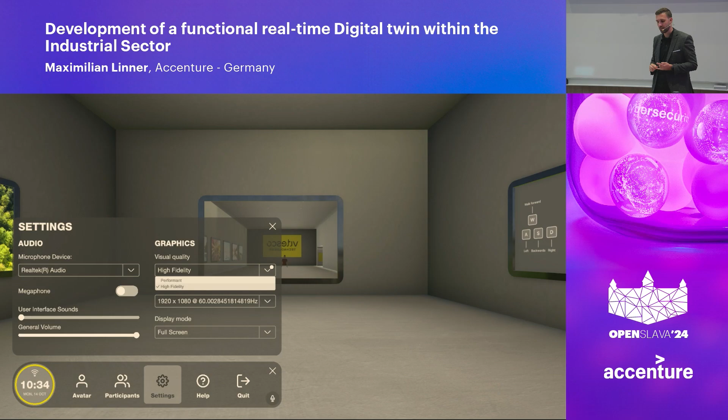The next point is, as I mentioned, the avatar configurator. So there are different styles how you want to configure yourself. Sometimes we just have some predefined avatars to select for yourself, but in this case, we really want to be able to configure the avatar as I want. So what you can see in here is that I can change my body shape, I can change my skin tone, I can change which kind of facial features I have, which kind of eye colors I have.

Obviously the clothing is important here as well. So different kinds of clothing, colors. So I think you get an idea how you can customize your avatar as you wish. So obviously I could be more to the female way, more to the male way. So yeah, this is the configurator which we have in place.

And the good thing, what I wanted to mention, is we have a team internally who is constantly developing and improving the different modules. So at the end, this avatar configurator is kind of 2.0, but if somebody in the background is updating it, making it even fancier, we can deploy it very easily into our projects.

The next point is a whiteboard. So obviously sometimes we want to write down our thoughts, right? To collaborate with our people who are in the 3D environment. So what you can see in here is that we implemented a whiteboard where you can bring in some sticky notes. You can write down any kind of text. In this case, obviously, hello OpenSlava. You're able to just write down.

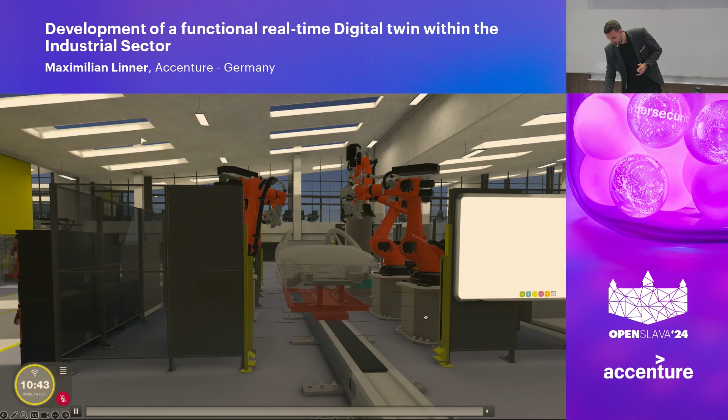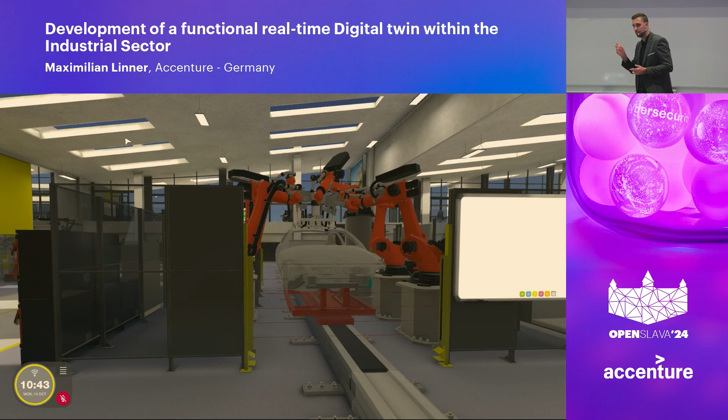So what you can see here is that we have the robots who are bringing the top of the car towards the car, and as I mentioned, these movements we connected with IoT sensors, and everything is streamed from the real production line towards Visual Components and from Visual Components into our application.

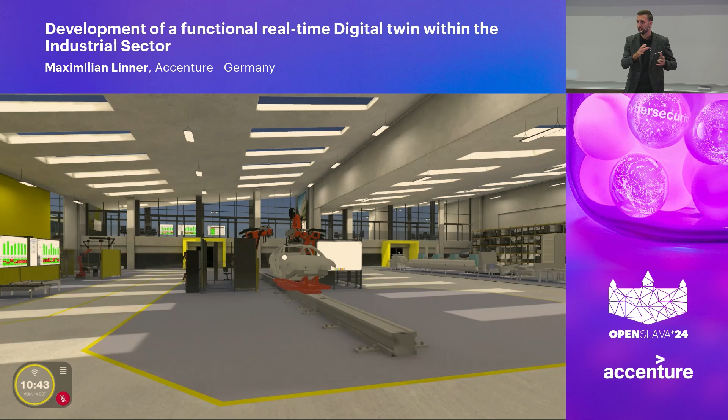The next point is that we also want to visualize different kinds of data, right? So we do have different MES dashboards within the production hall, and obviously we want to visualize them as well in order to see the current status of each and every single machine and station. What you can see here, for example, on the right-hand side is the OEE station, which gives you an impression of what the target was in the last 7 days, which OEE data you wanted to go for, and what the quality rate is.

Did I miss something? Didn't miss something?

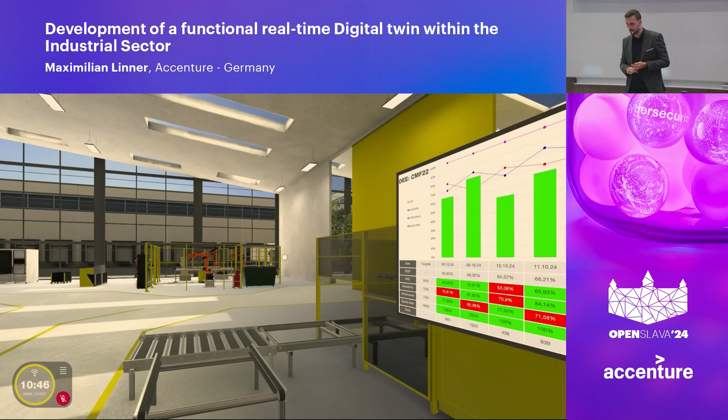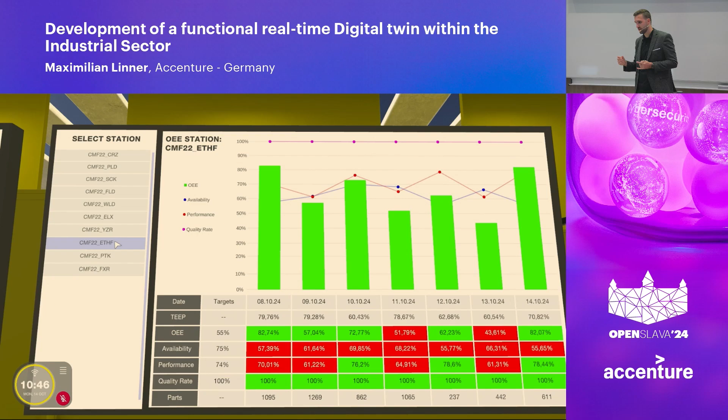So these kinds of analytics you're able to see here, and from a quality point of view, I think it's very good to understand. Yeah, exactly. So getting this data from their production lines into our 3D environment gives us another point of view in order to monitor the current state of the 3D environment and the different production lines.

What we further implemented is, for a different production line, a knowledge graph. Let me just start this again. So we have here a different production line, and within the production line we have a perfect overview of what information the stations have. Right now you see, as a basic, the line; every line has different machines, and you see the current state of the machine. Is everything working? It is green. If not everything is working, it's red.

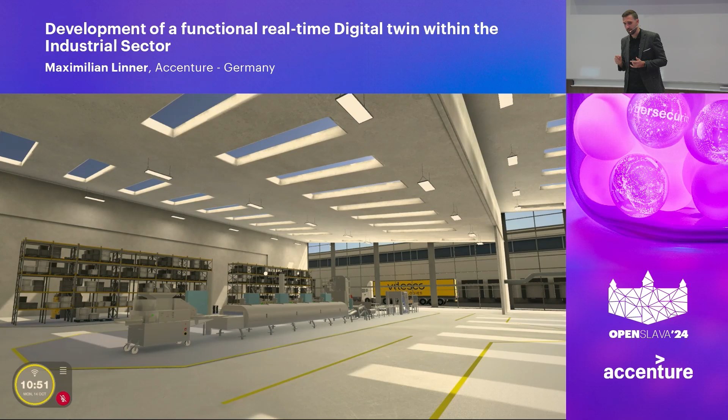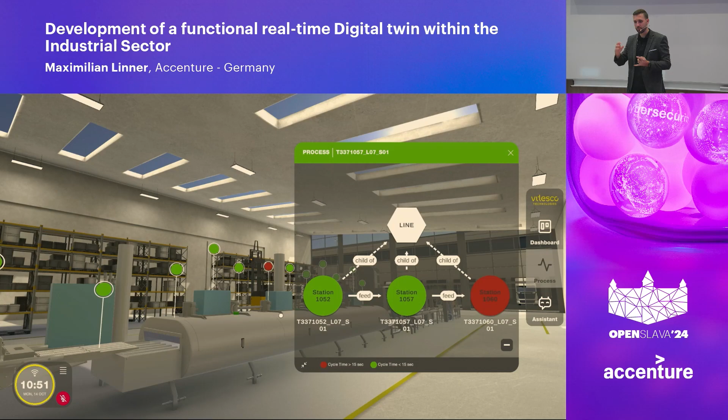And you see this overall point of view, but you can also click into it, and the idea as a next step is you can also add for the station what the vendor of the station is, what the entity is; all information below the station can be visualized as well. Because we wanted to get it running at the beginning, we said, okay, we go for these 2 hierarchy points, but in the future we will go deeper and deeper. So at the end the person sees exactly which information every station has.

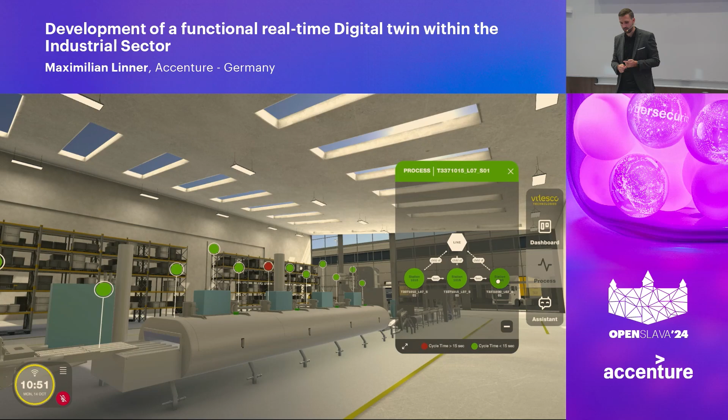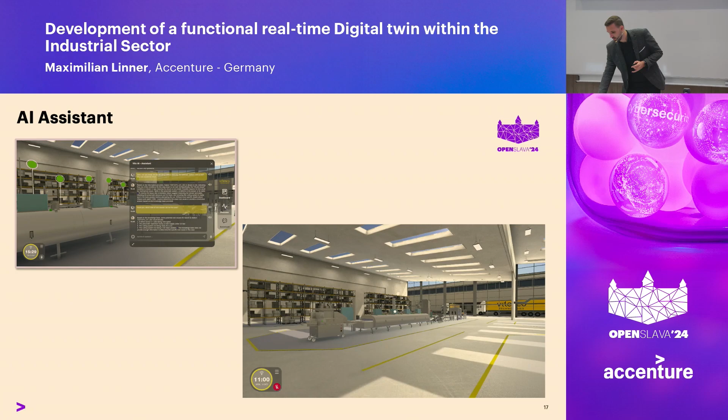And the next one is an assistant. Obviously everybody is talking about ChatGPT and OpenAI, GenAI. So obviously we included this as well. And I think this is very important because the user story behind it is that somebody is sitting at home or somewhere else and an operator is monitoring the different production lines. And we want him to get all the information based on the production line, in order to find out, if something is not perfectly working, how to fix it.

So what we implemented here is an AI assistant which can speak every language in the world. I think some of you hopefully are from Slovakia, right? So I inserted a Slovakian question about Vitesco, which is our client, and which information you have. So obviously we have 2 points here: it can select any information from the open internet, as ChatGPT is doing, but you can also retrieve answers to specific questions based on the production line with the AI assistant. Right now I just said, okay, let's switch back to English, because actually my Slovakian is not the best.

Which I'm doing right now, and I'm asking, hey, 1075 is red, why is it red? Can you give me some root causes based on the information you have from different entities which we stored in their database? So after asking this, they're giving me 3-4 different options. As an operator, I mostly have a second screen in front of me, so I can check whether number 1 or number 2 is maybe the thing which is wrong. So I said, okay, number 1 is probably the thing which is not working perfectly.

So the next point is to get information on which kind of remediation steps I can do in order to fix the specific problem. But sometimes obviously I can't fix the problem remotely, right? So the people on site need to fix the problem. So the idea right now is that I say, okay, create a maintenance ticket, fill in all the information I have right now, and send it at the end to the people who are working on site and can fix the physical problem in a physical way.

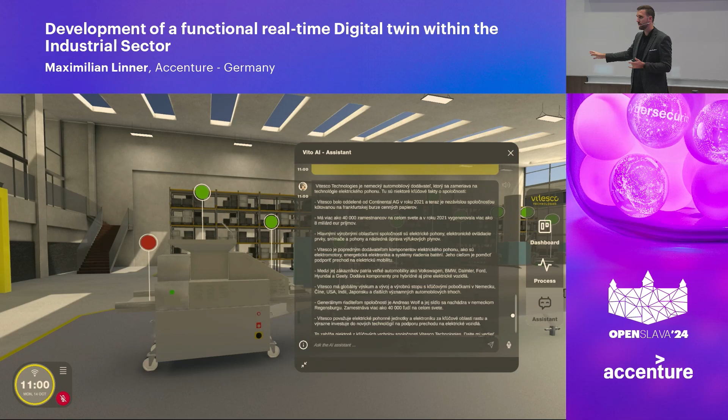Afterwards, he can say, okay, maybe I can fix it remotely, but if I can't fix it remotely, I send a maintenance ticket with all the information needed to the maintenance team. And then the people on site can fix it and say, hey, everything is fixed and the production line is working as it should. So these were the interactions which we have within the 3D environment. Obviously, there are more production lines, more statuses which I can share, but I think it gives you hopefully a nice glimpse of what the project was about.

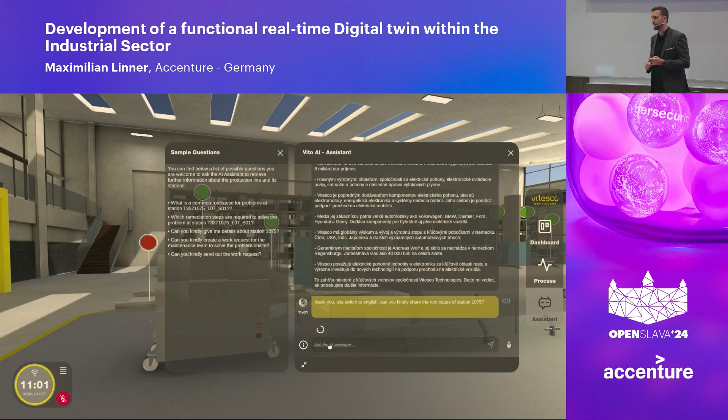So to conclude here again, what are the benefits of using a 3D environment? As I mentioned, the person does not have to be on site in order to see how the machines are working, how the statuses are. The person can monitor it remotely, see the status of every machine, OEE, OPM, and the KPIs of the machines, and everything in real time. As I mentioned, we have a latency of, let's say, 1 second, which is obviously very low and gives a very good impression.

The second point is that I'm not alone there. I can have my 3-4 person strike team in the 3D environment, and I can discuss with them what this production line needs and which kind of information needs to be included in the maintenance ticket so that the maintenance teams can fix it on site.

And the third point, and this is a part which we are focusing on in the future, is the ramp-up time. As I mentioned, the people in China, for example, don't know how the production line is working. They don't know which kind of work they have to do in order to make everything run smoothly. So the idea is that the people in China get a VR headset or the computer in front of them, and they do a training. And this training is how do I work with the production line which is coming in, let's say, 1 week to my Chinese production hall, which kind of steps I have to do.